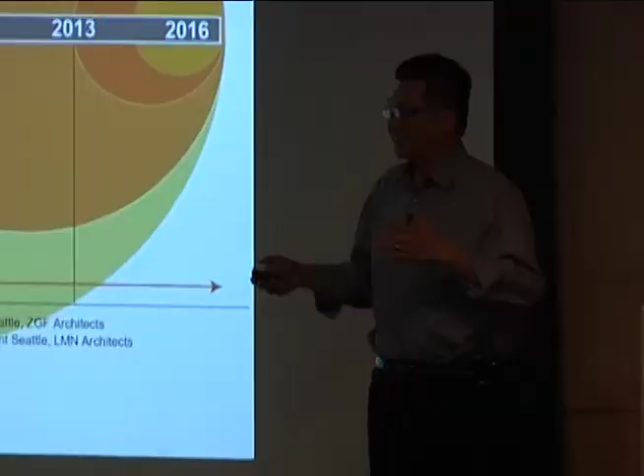Given the fact that I did come from this program years ago, I thought it would be fun if I just mapped out where I have been briefly, so that I remember to share with the school too. So graduated in 98... 89, and it is true that I bounced around quite a bit because I was very interested in just learning different things. I went to New Haven after 2 years at New York, then went to LMN, and then, as Jeff mentioned, I came from Vietnam of Chinese descent, and I really wanted to go back to China, to Asia at least.

So I actually got licensed in 95 and then told LMN that I would go to Hong Kong. I got a round trip ticket and $200 and I just went. The economy was great back then, so I ended up staying there for 5 years, then came back to LMN with no intention of ever leaving them, but things happened, so I did go to ZGF for 7 years, and then now I got home to LMN again.

Over the years, again, it's very fortunate the project types that I get to do, and one thing I will love to do that I never have a chance to work on is a fire station, so I still want a fire station. But this is pretty much some of the work that I have done over the years, which I think has been a lot of fun, and I certainly have been very fortunate, I would say.

Seattle, Washington, that's where we're located. We're about 160 people with 9 partners, and because we are one office environment, we tend to collaborate a lot. It's in our blood. When we work outside of the state, we collaborate with people, and that becomes something that we really embrace. It's not only internally, but externally, that's what we do.

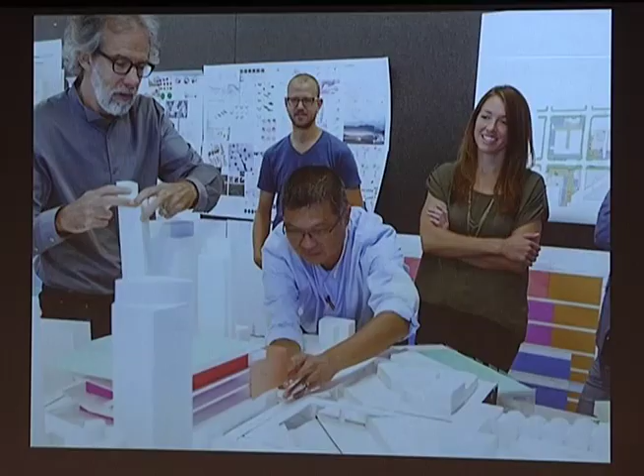And then we do a lot of design reviews within the office for projects, especially the bigger projects, and the intention is twofold. One is obviously to solicit ideas across the office to better the design, but more importantly, it allows the younger staff on the project to learn how to present better over time.

And then, of course, we make more models. With that, I want to show a brief video that I think would give you a good sense of who we are.

Okay, so I missed one slide, sorry. With all of that, we formulated back in 2009 this design and research group that we call the Tech Studio. Basically, we do simulation, fabrication, and obviously visualization and parametric modeling. Here we go.

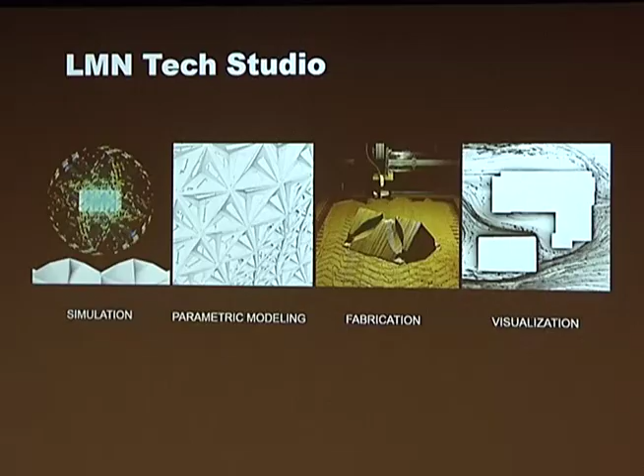The firm is very interested in how we can play a part in the evolution of cities in the 21st century. As cities get increasingly dense, the public realm becomes very important. Those issues are not simple. They involve broad thinking with a number of different perspectives. A city at any moment in its life is not an aggregation of objects so much as a set of systems, complex cultural, economic, and social systems.

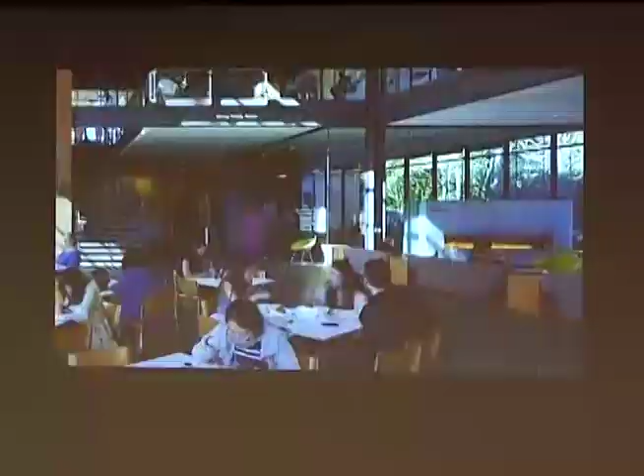LMN embraces that longer view and larger responsibility. Some of our most interesting work has been where we've engaged non-traditional collaborators like environmental psychologists or marine biologists. You can see it in the way that building operates. There's kind of a real blurring of the lines between the building, the park, and public interaction. Some of the most important buildings have been designed by LMN.

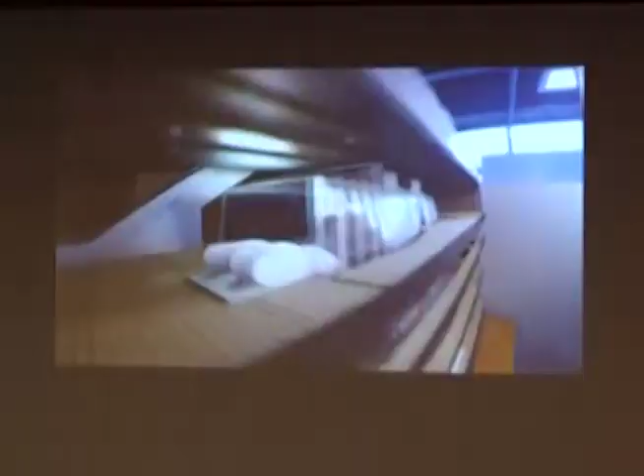These are places that we go that contribute so much to just the heart of our city. Not only are they creative, pushing the client forward and thinking about what might work, but they really work very well with so many divergent voices, and helped us all understand how we could actually achieve this incredibly complex puzzle.

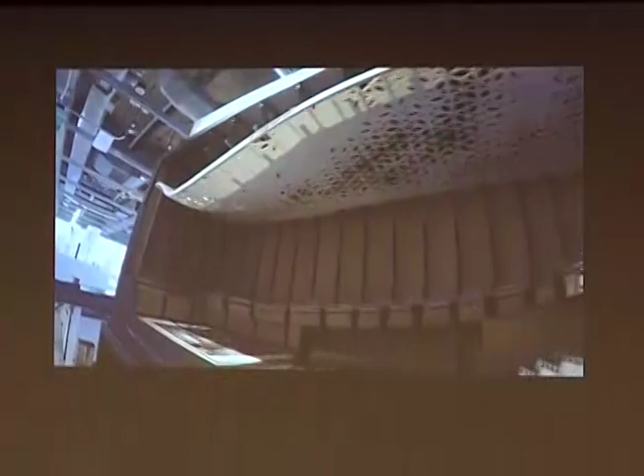One of the things that's really interesting about this practice is the use of digital strategies to re-establish a relationship between thinking and making, and how architects deliver value in that intersection is the big question of the 21st century.

The way we're trying to set the shop up is basically that it's a garage. People can come down and try to manifest what they see on their screen right now in real time in a physical world. There's just such a huge variety happening in the office at any one time that you walk around and it gets you excited.

And clients love it when they come in here and see the wide range of discovery we are making. When I arrived here, there was a really great culture of self-expression - I'm sitting next to a partner, and I'm an intern, there's no barriers between anybody. I just see our project as a little city.

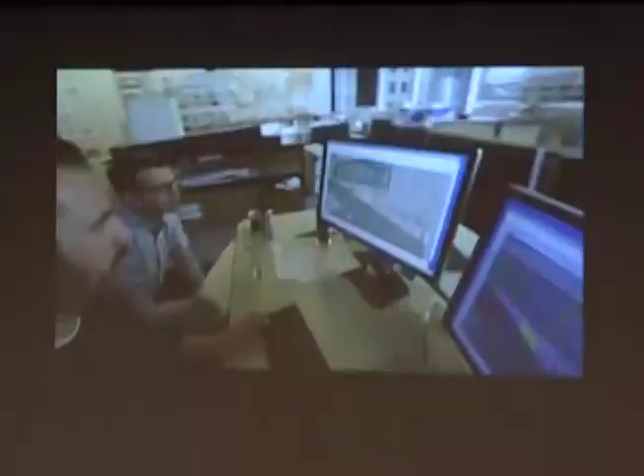I think it's beer every Thursday for me. That's awesome, and all the free food. And the great thing about the profession is we're always learning and we're never done.

Yes, we do own a couple of drones.

Obviously, one of the first projects that people were aware of us for is the Vancouver Convention Center West. This is, again, with collaborators beyond just the architects - landscape architects, structural engineers - but a list of some 30-something international consultants that we actually have to collaborate with, including a marine biologist, and I'll explain a bit more in a bit.

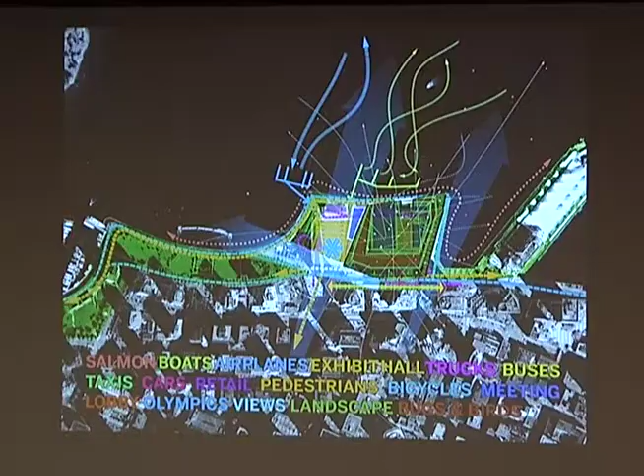This is a pretty interesting, complex program, not only just the convention center, but the siting of it and trying to stitch together the missing piece that the city left there. It has a lot more to do with beyond the functional program of a convention center, but how to engage the urban side of the city and also the natural surroundings, with all the green spaces we provided, stitching together pedestrian and bicycle linkages and the views. And last but not least, for all the bugs that showed up on the roof there.

The interior space is very nice, but what intrigued us more about this building was actually all the exterior spaces that we were able to create. Some of these images are actually from the Olympics back in 2010 - the Winter Olympics - and also how the locals used the space in ways we didn't even imagine. But the point is, by creating them, it will happen.

This was set up for a banquet for the convention center, but on one hand there's the juxtaposition with the urban context and the tower, and then you turn around and your view is literally stunning. That was a really great site we were able to work on. The non-convention center aspects, just as important, are lined with retail, and local people get to use and enjoy it every day without even being aware of what's going on in the convention center.

Beside the human habitat, the marine habitat is also intriguing to us. It's built right at the edge of the water, so we did engage a marine biologist - she came out from the UBC program to understand the concrete plank, the precast plank, and how to use various aggregates and things to attract the most marine life. At the end, we nicknamed it the fish condos down there.

On the roof is the largest living roof that was ever made at the time outside of the Ford assembly line, and since then it's part of the water collection and conservation system coming down from the roof, in line with all the building systems and sustainability strategy employed. It did end up being the first convention center to achieve LEED Platinum - even though I like to joke that it's the Canadian version, it's still a very good one.

Now it has about 4 colonies of bees, some 250,000 bees that live on the roof.

Again, this image I also very much enjoy seeing. It's like it could be anything. It didn't have to be a convention center. So it's achieved the other purpose: to stitch together what's missing there as part of the urban life.

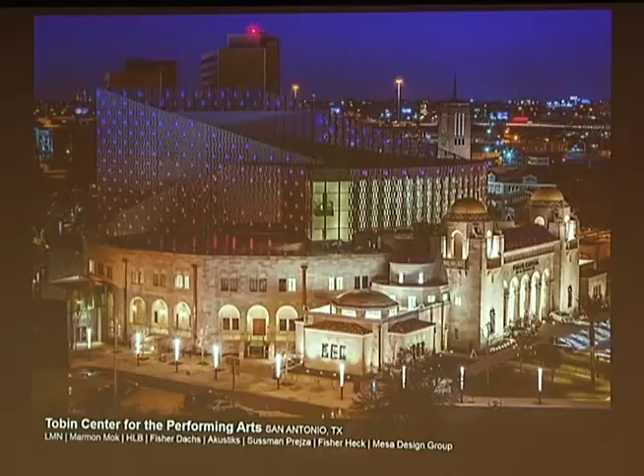This next project is also quite interesting for us to do: the Tobin Center down in San Antonio. It's an existing historical municipal auditorium, and we were awarded to do the project where we gutted out the inside, renovated the lobby, and then instead of inserting one hall there by tilting it, we were able to find space for a smaller hall that inserts in there.

And in addition, similar to Vancouver, we were trying to find the opportunity to create additional outdoor spaces. In this case, it's the Riverwalk event plaza that leads down to the Riverwalk there.

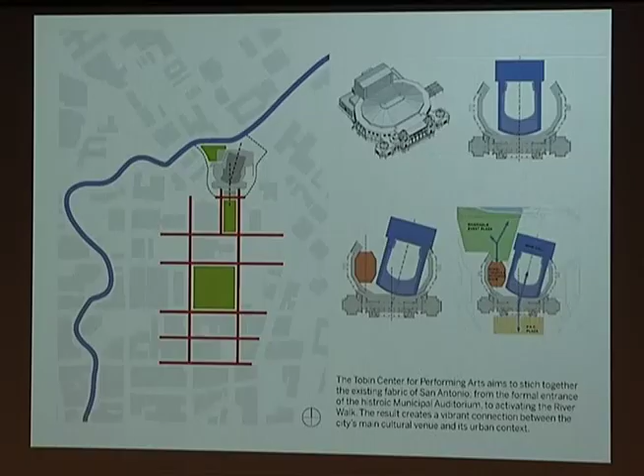San Antonio is called the city of festivals. They have a lot of really beautiful color and textures and such that we drew our inspiration from, and from that created some of this pattern that actually happened on the building design itself. Wrapping the hall is this painted aluminum panel, some of them perforated and backlit with LED.

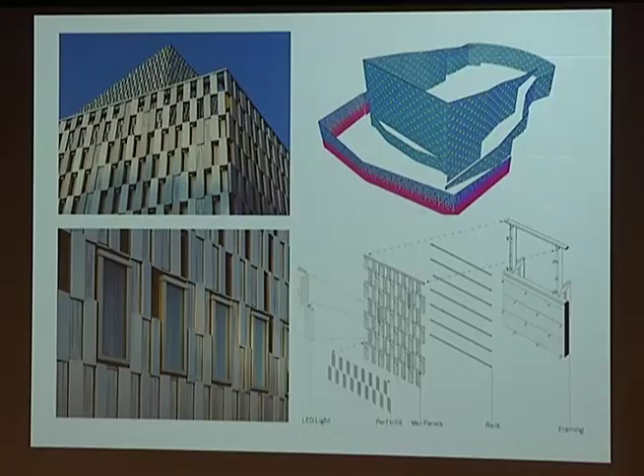And this is what it looked like. It was opened about 2 years ago, and people find many different ways to use the exterior spaces. I really like the yoga on the plaza one.

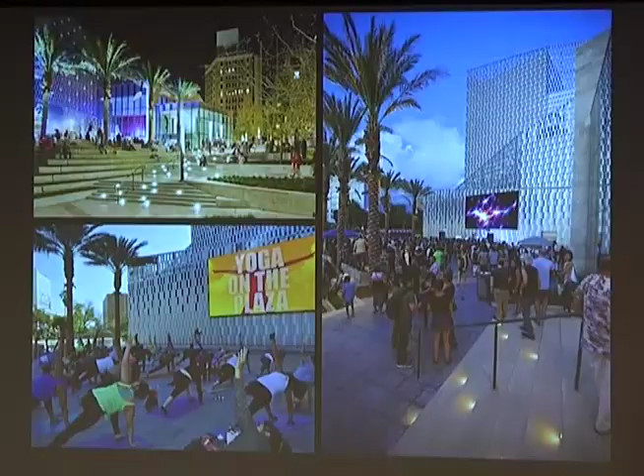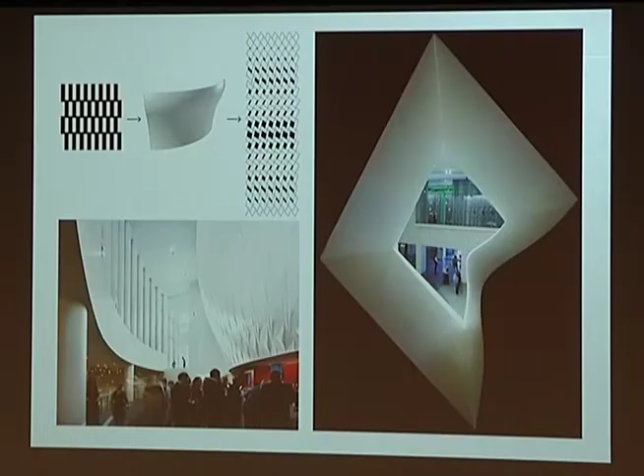It's also the first hall in the US that has a flexible floor, the gala system, that would allow them to convert it from anything from a cabaret to symphony to a rock concert and even banquet.

Back to closer to home now, this is University of Washington Business School. We were fortunate to be able to land this commission.

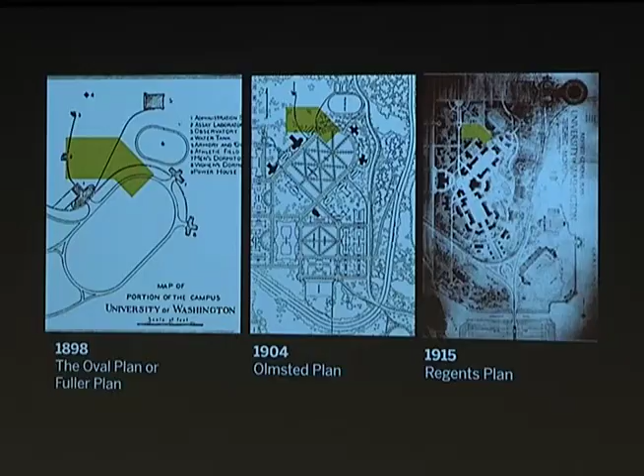It is at the edge of the Olmsted Plan, or actually Denny Yard, and it evolved a bit, but it's one of the bigger green spaces on campus. And this building is literally at the edge of it.

Zooming in, we were also intrigued by the fact that there's a circulation pattern, not vehicular but pedestrian, that cuts through the site, and we always imagined that as something to respect and use beyond the normal spaces and program requirements inside.

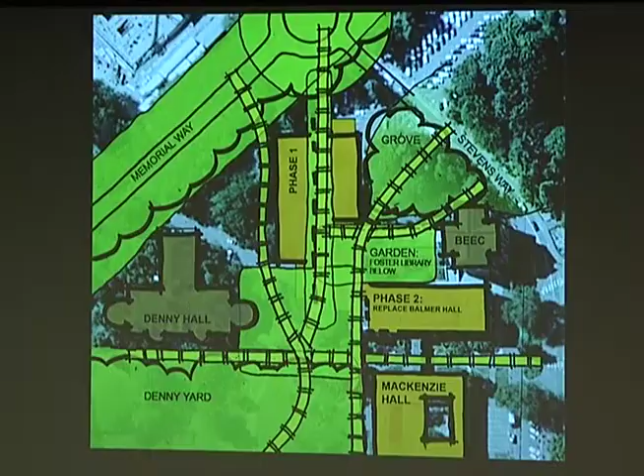Since then, we finished phase 1, called PACCAR Hall, and phase 2, Dempsey Hall, have been completed. Currently we're working on phase 3, Mackenzie Hall. Once that's finished, we'll be able to complete this corner of Denny Yard.

Programmatically, business school has a lot of classrooms, various styles of teaching. This one is about 80% horseshoe-style interactive classroom. You obviously have bigger audience tier classrooms and flexible event space also set up for gathering.

But what intrigued us most again is the in-between spaces - the space connecting all the classrooms and the circulation pattern, and can we make something more out of it? This is one of the main corridors with eddies set so often to allow for informal interaction and chance meeting.

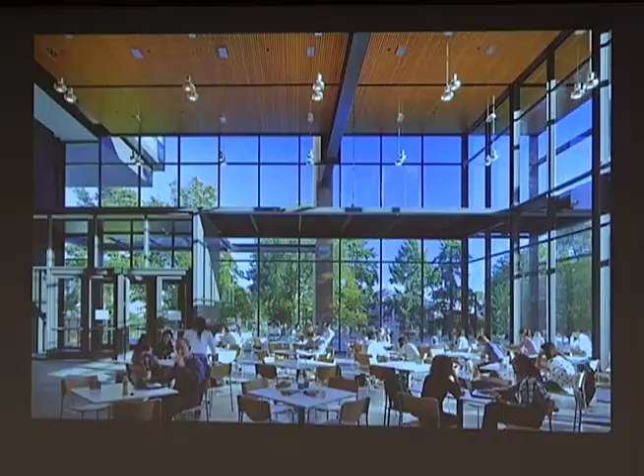One of the bigger lounges, and in this case it's the cafeteria actually, with a lot of daylight, and then the view out to Denny Yard that we're trying to capture.

Since then, this was great because it allowed us for the first time to go back to the building twice to actually survey the students and understand how they have used the space.

Peer-to-peer and non-peer interactions matter, but since this is mostly MBA students, the career bit is key: interaction with non-academia, with potential employers that come to the space, has become extremely important. The notion of bonding within one group versus bridging from one group to another, and creating spaces that allow for all of that to happen, is quite important.

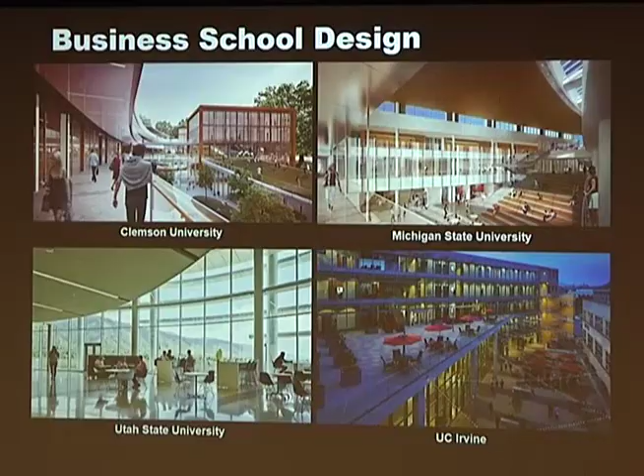Since then, we have used the knowledge we gained and designed and completed the business school at UC Irvine and Utah State University's Jon M. Huntsman School, and currently we're working on two business schools, one in Clemson and the other in Michigan State.

As part of our practice in recent years, transportation has become extremely important. The traffic in Seattle is a little bit worse than here. About 10, 12 years ago, the light rail system started in Seattle.

Not only what it looked like and whether you can find it, but its relationship to crossing the busy street with bike lane and pedestrian way back to the Rainier Vista, the green area that overlooks Mount Rainier. It's right next to the UW Husky Stadium, which I'm not going to go there about Pac-12 football tonight.

Again, not unlike Vancouver, a lot of different systems come together, and how to capitalize and solve that has always been interesting to us.

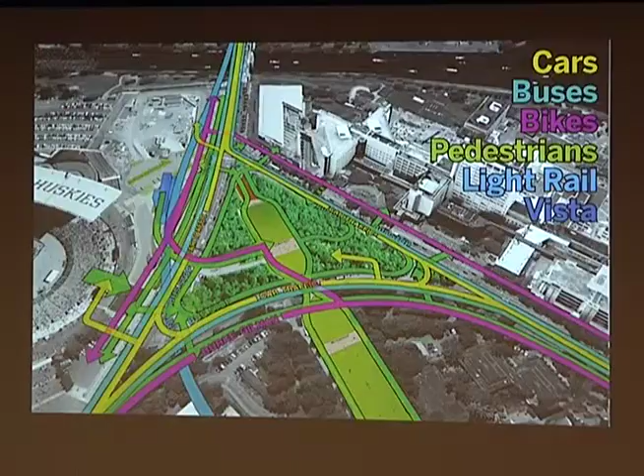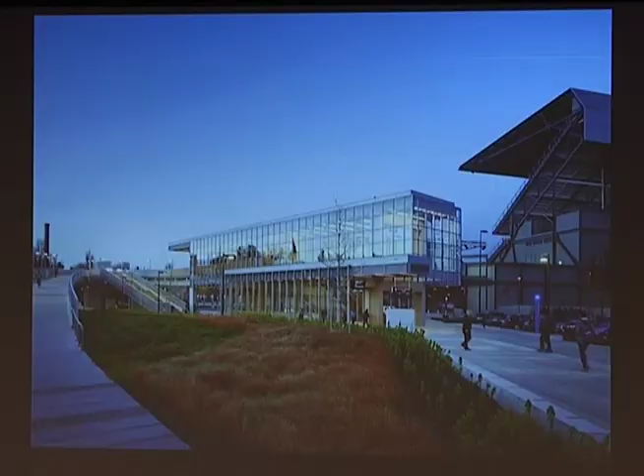And obviously, when you get close to the exterior, the daylight is the thing that draws you out. So again, this was a really fun project for us.

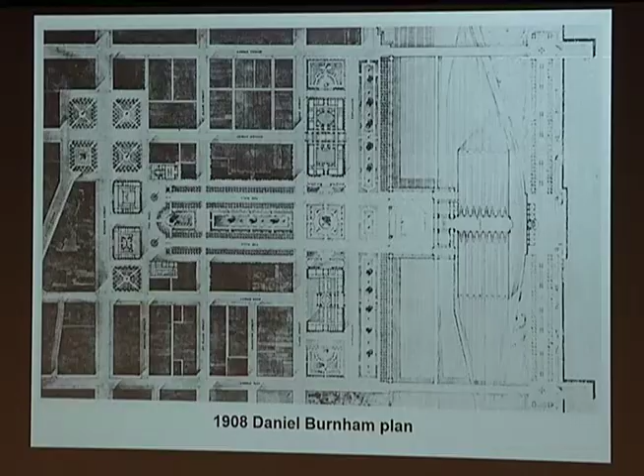This one is the Cleveland Convention Center. Somewhat different than Vancouver, but again quite fascinating. It comes from a 1908 plan that created a central green space for the city, and we're trying to respect that. Programmatically, it's an exhibit space with ballroom space.

We're trying to put them underground, finding a way to insert something and lift up certain aspects of it. This program actually comes with an office building to the side also. Sectionally, similar to some things we learned from Vancouver, we lifted up the park to form an entrance to the exhibition space below.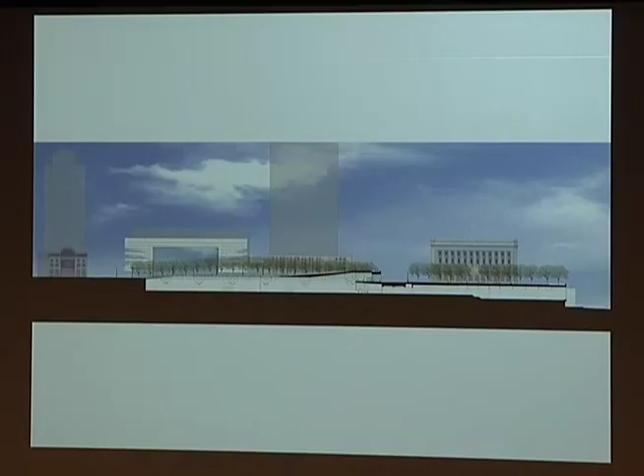It was a bit controversial for some folks because they were wondering if we were blocking views from inland. So we went through a lot of study and showed various things, including the existing view corridors, where it's true the view is wider, farther out, but it's truncated at the park because of the original planned buildings, if they were to build it.

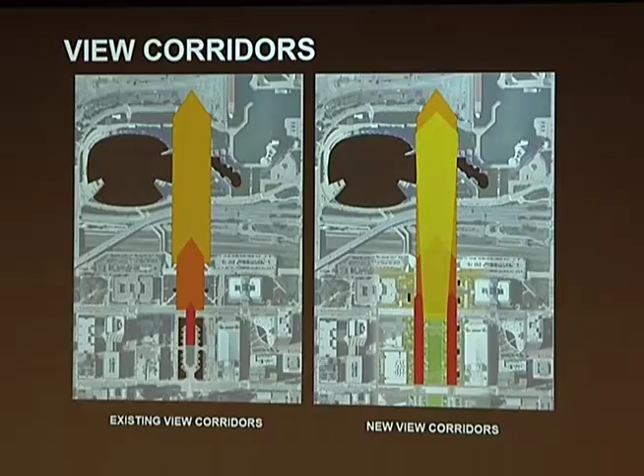With the great thing we were doing in Vancouver, what we did not achieve there was that the exhibit space was actually underground. So this is the first time we were able to lift this and bring in daylight into the exhibit space. This also helps when clients begin to realize that's something people want, because for the longest time, exhibit spaces tend to be just black boxes where people like to control the lighting environment.

As part of that, like I mentioned earlier, is the office building. Originally it was conceived as a very normal, simple office building with a big atrium, but it would have been just simple precast with ribbon windows on it. Halfway through the project, the client thought we needed to make it more dynamic to relate to the surrounding.

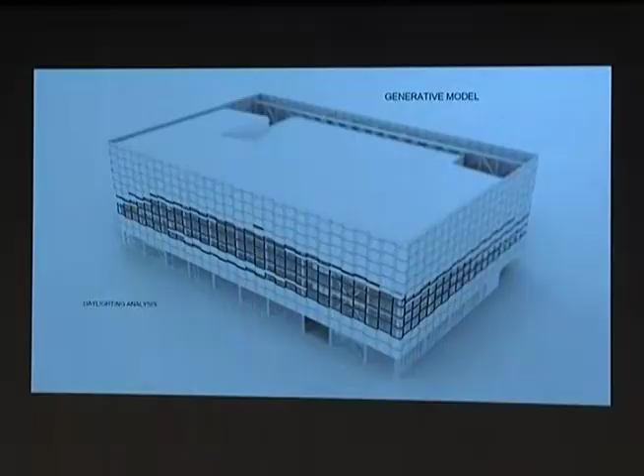So we ran through a lot of daylighting analysis and tried to create patterns and also create something interesting on the facade.

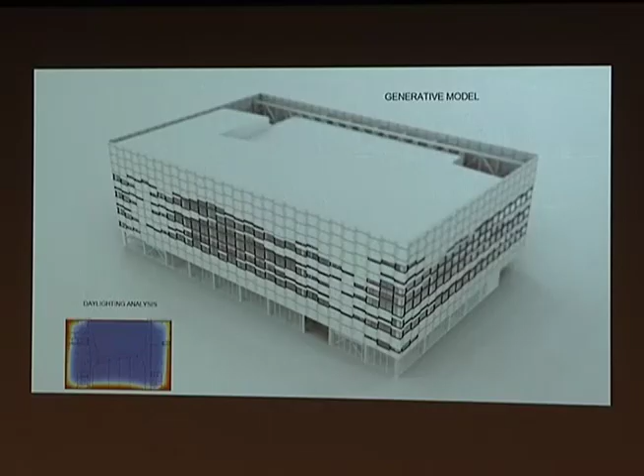This was back in the late 2000s, so Revit was not as advanced as now. So we used Grasshopper to create it, and then we had to write our own plugin to translate that into the Revit model. With that, it would allow us constant, instant updates. If we change something, the contractor can get that information right away.

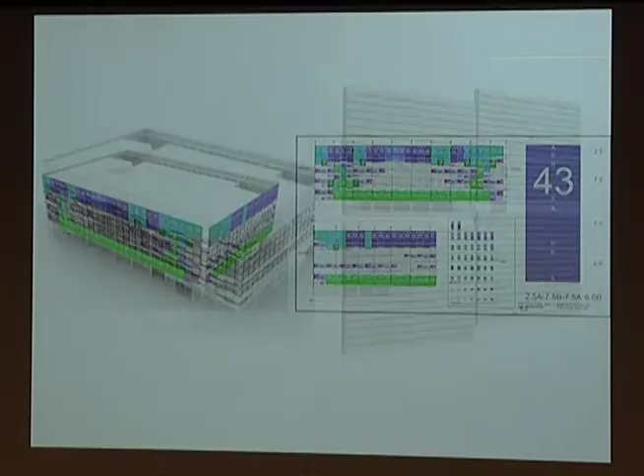With that, we thought, okay, let's go and play with the precast panel and see what we can do. A lot of historical buildings there have really fine horizontal rustication on them, so we were trying to see if we can do that, testing different looks of it.

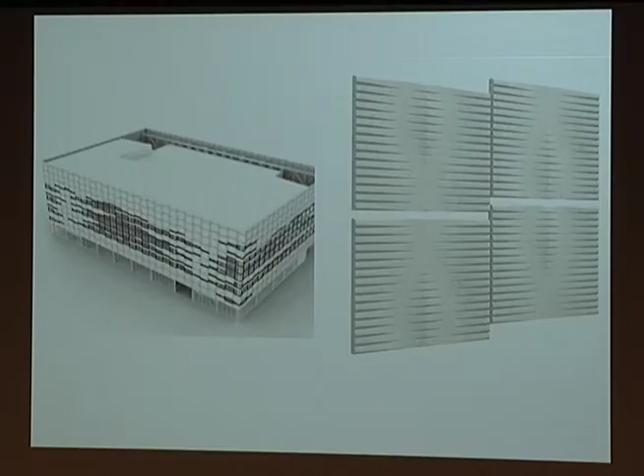And this was the one that we thought had a lot of potential, so we tried to make it. This is a half-inch scale model that we created, and through trial and error, what we were trying to determine is how thick, or what depth and dimension, we needed to create the light and shadow that we desired.

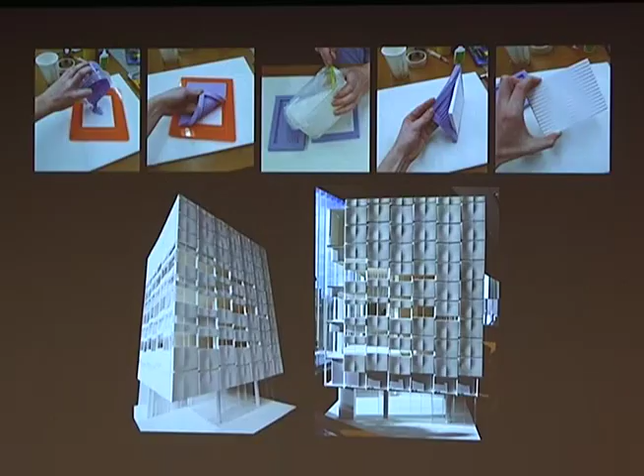It turns out 1.5 inches is plenty, more than enough. We did look at 3 inches, but it got a little too much, and obviously cost is always a factor. So with that, we translated that and gave it to the precaster, and they used it to build.

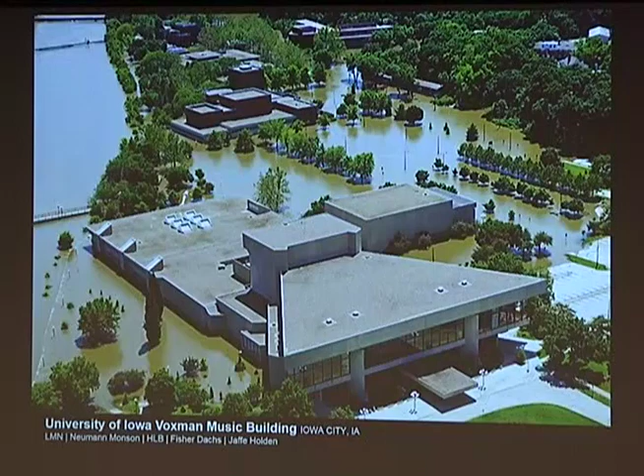And then again, this is one of the wonderful projects that shows up once in a while. University of Iowa, this is back in 2008 when the existing school was flooded out. With the FEMA money, we were fortunate to be selected, and the site was moved into downtown instead of at the edge of the river.

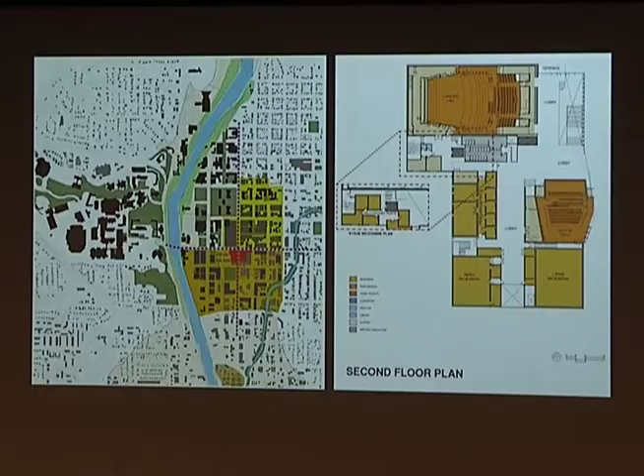Again, this is a great program, always fun to do this sort of work. But what we were looking for was also the in-between spaces and the client's desire to bring daylight into every hall, the big recital hall, and all the practice and rehearsal spaces.

From that, we were using daylight not only for the room, but also as a means of intuitively guiding how one circulates through the space, and informing us how to stack all the programs.

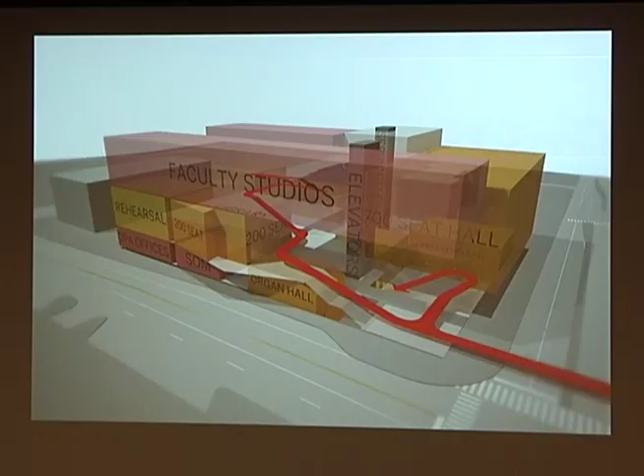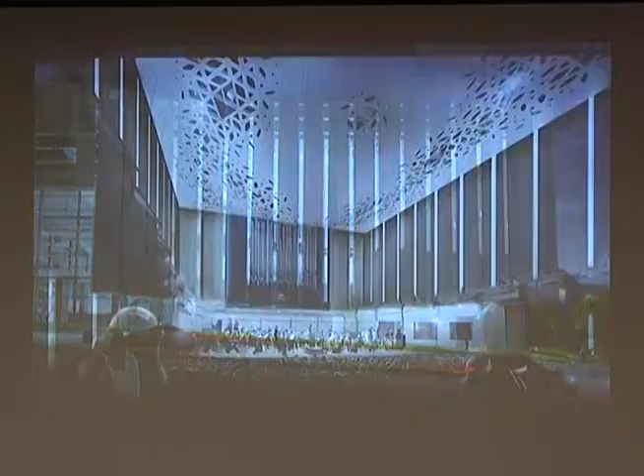And in the interior, that's what we were conceiving. But one of the things that's really intriguing about this hall is the ceiling itself. We know that we need to have reflective sails over the stage side, but we also wondered if we could expand this thing and create a ceiling outlet to make sure it captures the house light, the stage light, sprinkler heads, and all of it.

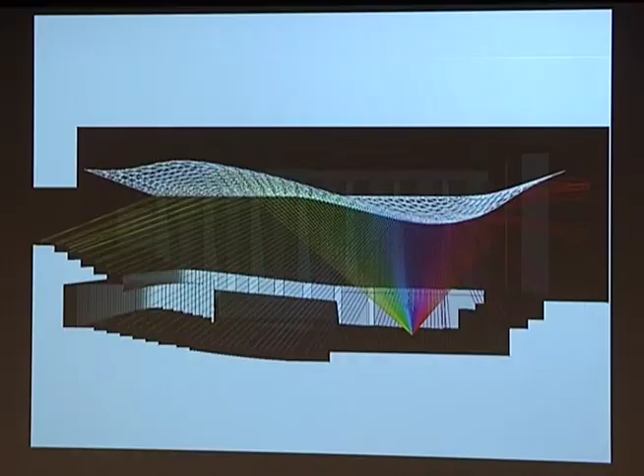So this is the one that we actually worked through with the acoustician. Sound is a wave, so we can approximate it by ray tracing. A very smart person, not me, wrote the script, and then we figured out how to manipulate this, and it could be done live with the acoustician in terms of how he or she wants to shape that.

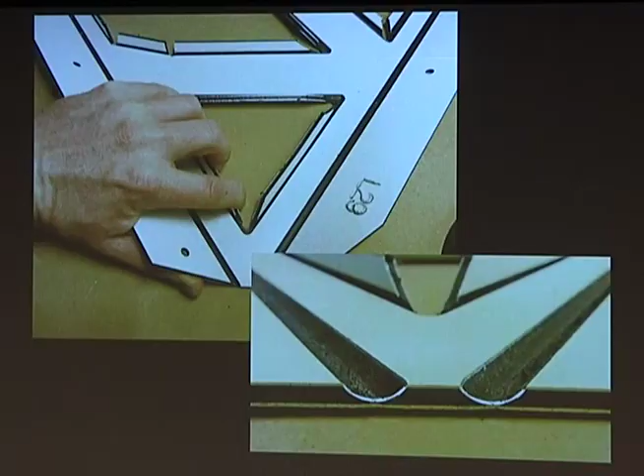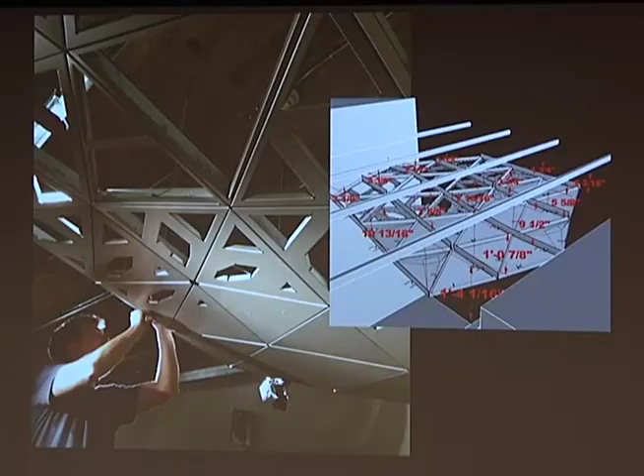So with that, we thought we should build it. One of the materials that's quite commonly used out there is aluminum composite panel, literally used for gas stations. So we bought a lot of that and made it ourselves, just to prove that we can do it. We built it at third scale and actually hung it up in our office, testing out all the kinks. From that, we mapped it, and it became our documentation to go out as a low bid job. And this is what it looked like a few months ago.

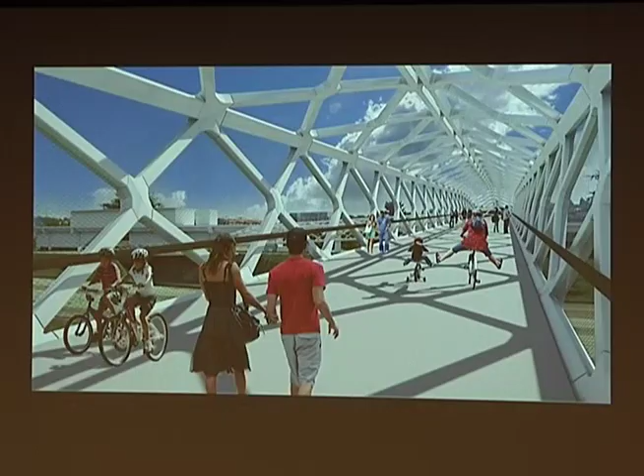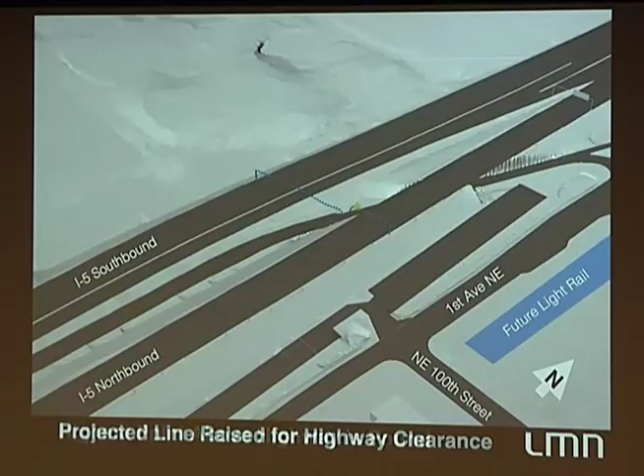So this is one of the things that we actually brought to the meeting to work through with the city, WSDOT, and the neighborhood group — how to figure out the alignment and where it should be. That all needed to satisfy the ADA slope requirement, and also the bike lane curve radius that came into play. This was a very helpful tool for us, and eventually this is where we landed in terms of the route.

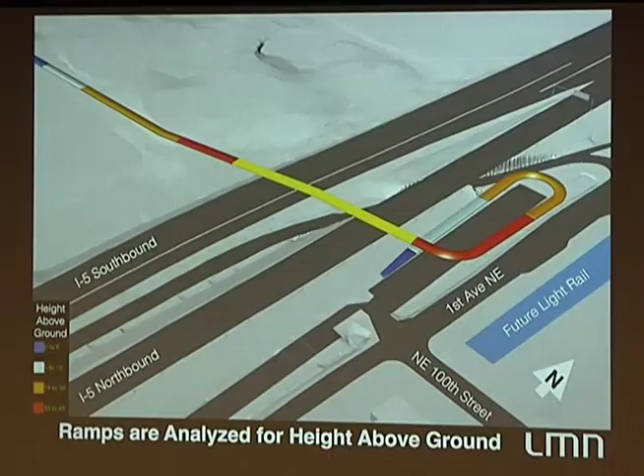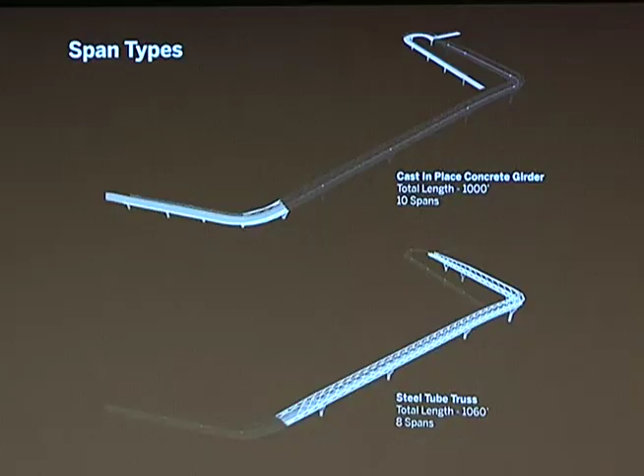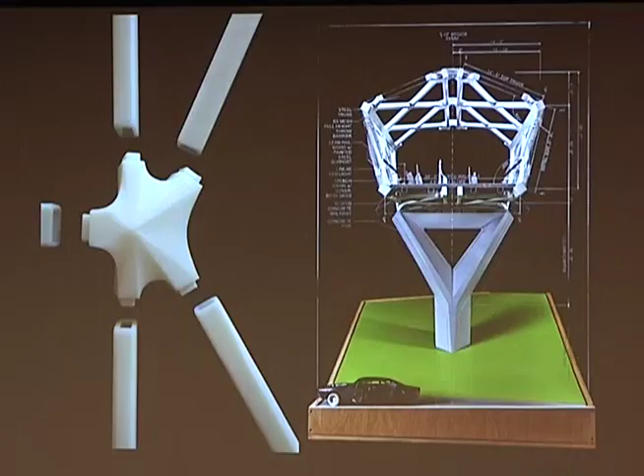From that, we also figured out that the middle span could be done with steel tube trusses. So we simulated it, and figured out that there are probably six different types of cast nodes that we need, because that's where the money becomes expensive — when you have to make the molds for them. From that, we not only virtualized it, we actually built a mock-up, in this case just with in-house 3D printing. We then constructed this sectional model, which became an extremely useful tool for the office, for public outreach and meetings with the various agencies.

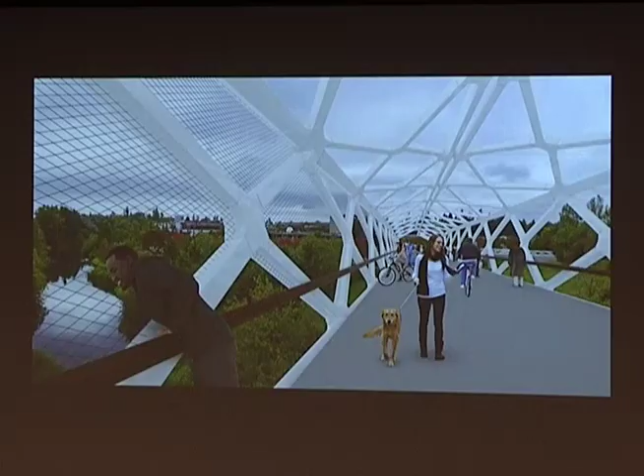Again, with this open sort of bridge, we hope that it would allow people to be more engaged with the environment on the exterior.

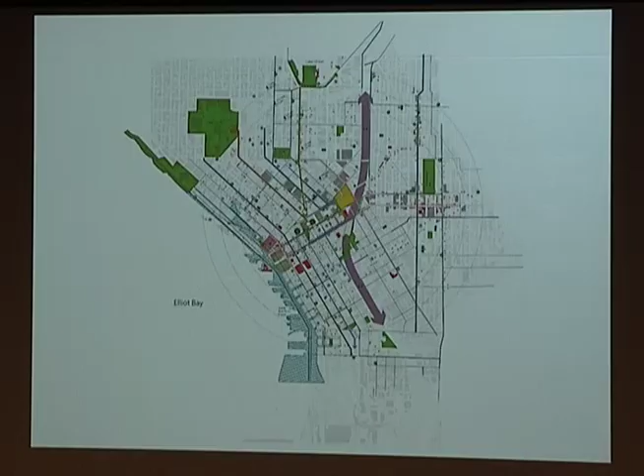The city of Seattle has grown a lot, and we're part of it. It's great that we've had the fortune of working on many projects since then, and this one is the most recent convention center we're working on. The yellow box is the new site for the expansion project, with the convention center and co-development site. Over time we've had the fortune of working on all these little boxes shown here—some under construction, some completed, some still in design. It's always great to be able to influence quite an area of a city.

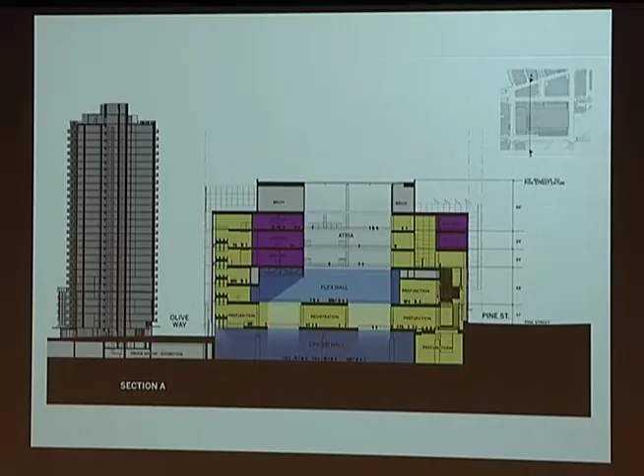This is a stacking diagram of the current convention center. It would be the tallest in terms of number of stories—11 stories. Sectionally, at the bottom you have the exhibit hall, and because the street varies in height, we're able to bring daylight into it, not unlike Cleveland, while also testing the notion of cutting holes through the building to create atria. On the left, where the truck loading is, we're stitching two towers through where the core should go—a residential tower at 300 feet and an office building at 240 feet. It's a lot of fun, and this is currently in design development.

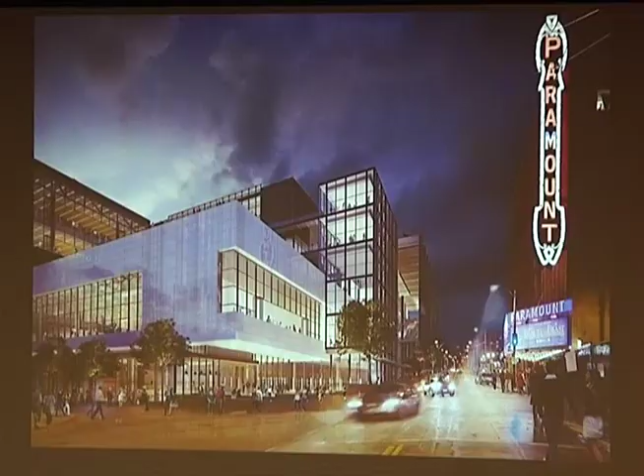Some of the breaking down of scale here relates to older buildings nearby—the beloved Paramount Theater is just across the street. Being in such an urban environment, and applying what we learned from Vancouver, we're trying to create as much retail space as possible at all the edges, except where the convention center entrance is. In some instances, the market becomes a mixing zone between convention center goers and local people. On the other side, sitting on top of the loading area, is the office building and the residential tower.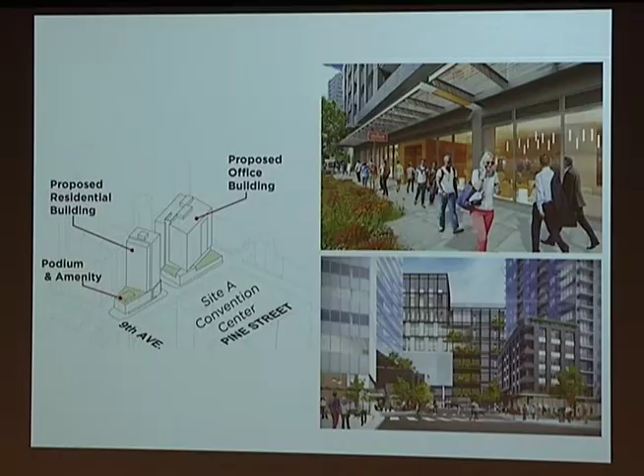Last but not least, as the city grows, land becomes less available, so it makes more sense for someone to build taller. This is for a project in Columbia, in a neighborhood with no residents at all—mostly office spaces. Our client decided it would make sense to put about 1,000 units of residences here, to make it more of a 24/7 neighborhood. As architects, we agree.

One thing we wanted to touch on is: if you go from a horizontal neighborhood with all its amenities, how do you translate and capture that into a vertical environment? Adding to the city, the site, the context, and the influences form part of what we think is necessary to consider in the design of this tower.

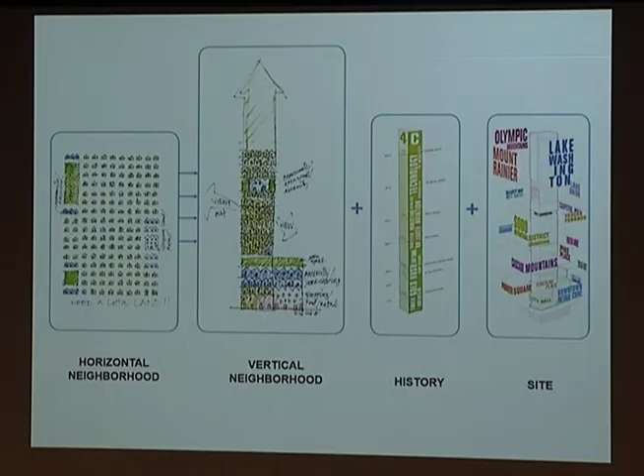On the more scientific side, we started by understanding where the tower should go. The curved face in the first image is actually the Columbia Center, the black tall building—the tallest building we have right now in Seattle. Whether we like it or not, it's very iconic and part of the city, so we want to respect that. Also, if you don't block their view, chances are they don't block yours either.

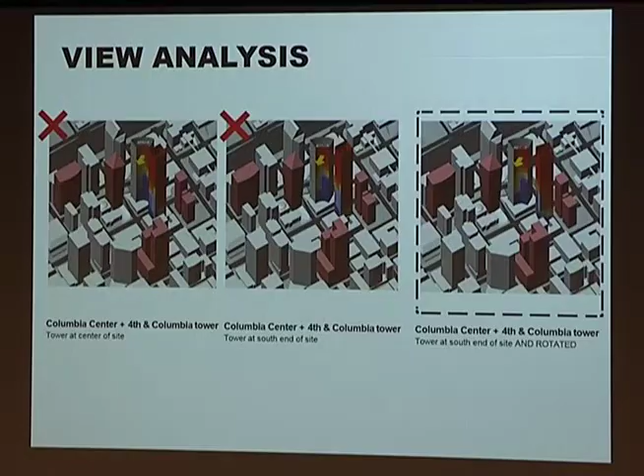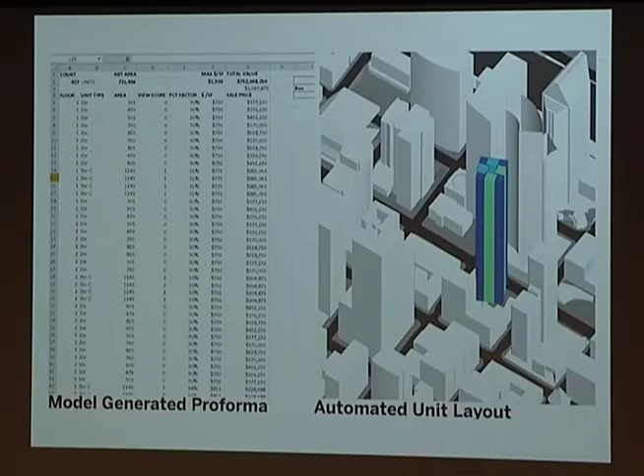More locally, we shape it based on local conditions like various other buildings' heights. At the same time, we can generate a spreadsheet from it—assigning a view score that the developer can use to place value on those things. This can happen very quickly: if we change the unit layout or the stacking, we can put out a spreadsheet showing all of that.

Of course, the fun part of it is also just form making, and we just generate a lot of them.

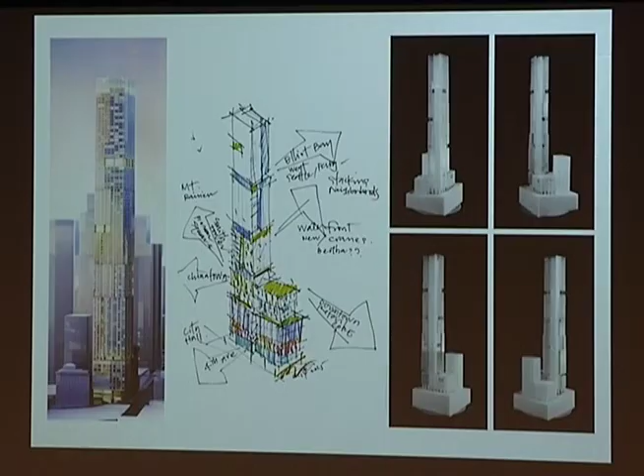This was generated a number of months ago as part of the city design review process that we have to go through.

Here's a good section that shows all the yellow are residences up high, and the blue spaces are the amenity spaces for the different neighborhood groups, which also happen to tie into the structural requirements of outriggers and other things we need to deal with.

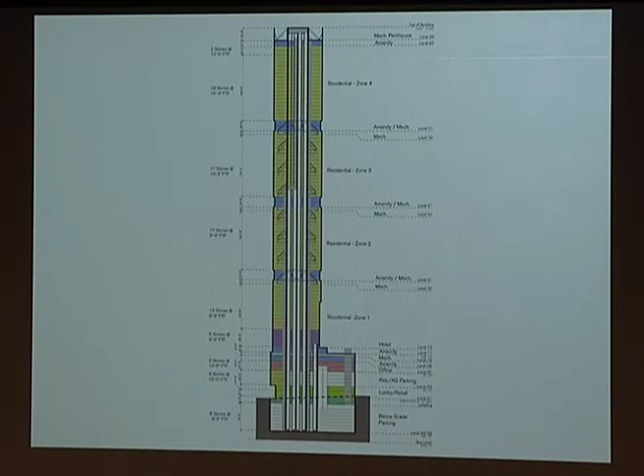Closer to the ground there is a variation of retail, lobby and office, white below-grade parking, and some above-grade parking that I'll talk about in a bit. Dialing that in with the structural requirements is always fun to do.

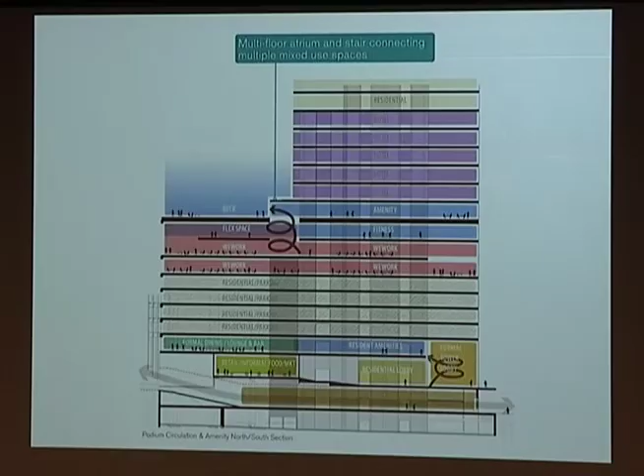Just at the podium, again, locally speaking, we're trying to create two-story volumes and in-between spaces where we can to improve connectivity.

This is a view on Columbia Street. If you know Seattle, it's quite hilly. The avenues run parallel to the water, so they tend to be flat. The streets run perpendicular to the water, so they tend to be quite sloped. Columbia Street is certainly one of them, and this is an attempt to drop the plates of the retail spaces to connect more than just at the corner.

By the time you get down there, it's the garage entrance. I mentioned earlier there was a lot of below-grade parking. Currently, above the two-story retail there is four stories of above-grade parking.

Instead of a normal ramp system, which would eat up a lot of space, we considered that there's a lot of car sharing right now, especially in big cities, along with the thought of automated, non-driver cars. We believe that in the future maybe we don't need as many parking stalls.

So this one is a test, but the client really wanted to do it. Instead of ramp parking, we put a flat plate on the above-grade parking. We're going to install two-car elevators, so it will be valet. The idea is, over time, to future-proof it—if there's not as much need for parking up there, we could convert those floors into more residential units.

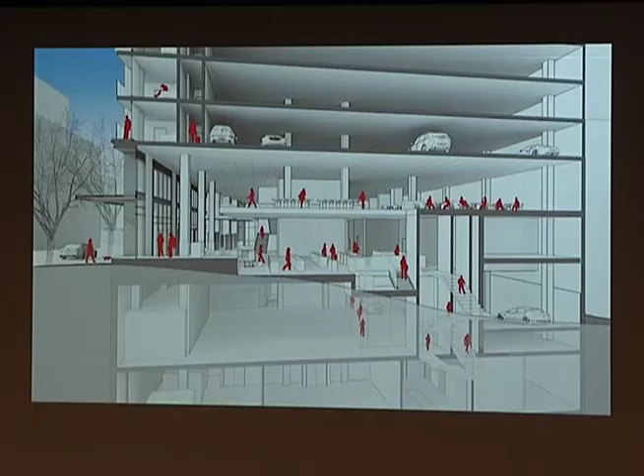This is a bit subtle, but the corner of the tower comes down because of the tip, the rotation we created. What I enjoy most is the image on the left-hand side—the corner of the Arctic Hotel, a really old, great terracotta building that has one bay of terracotta turning the corner. So we shifted our building in at that point to expose that face as part of the experience.

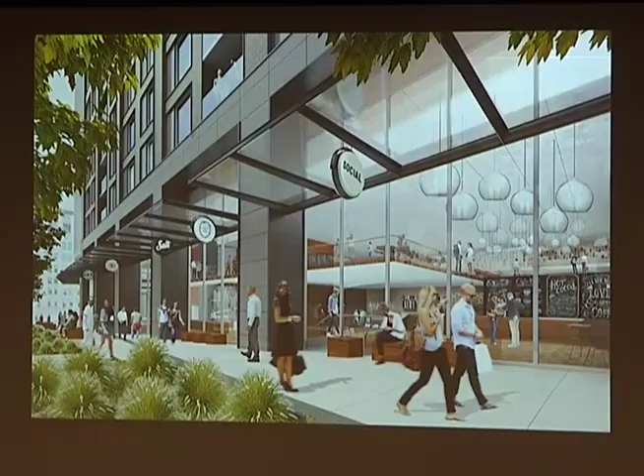Again, this is the retail space along 4th Avenue. The intention is that the retail and the lobby are actually very blurry—there's no demising wall or anything—so it's more about extending the space of the lobby and vice versa.

So, bringing you back to the culture of the office—this is a weekly schedule, and sometimes it changes a lot, but in addition to project work, we have a lot of functions that people go to and learn from.

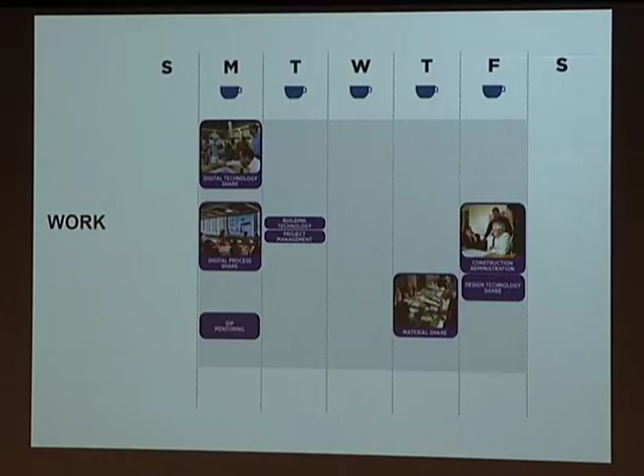And of course, we have Beer Share on Thursday, which is always a big thing for everybody. In addition to that, there's a lot of grassroots outings on weekends and evenings.

So with that, I just want to say it's been very fortunate of me to be able to do all of this and be part of this, but this is where it all started. This is done by non-computer. This is my 5th year project, one of them.

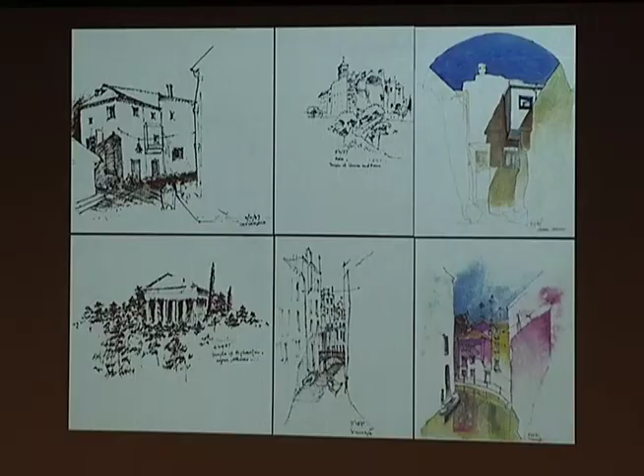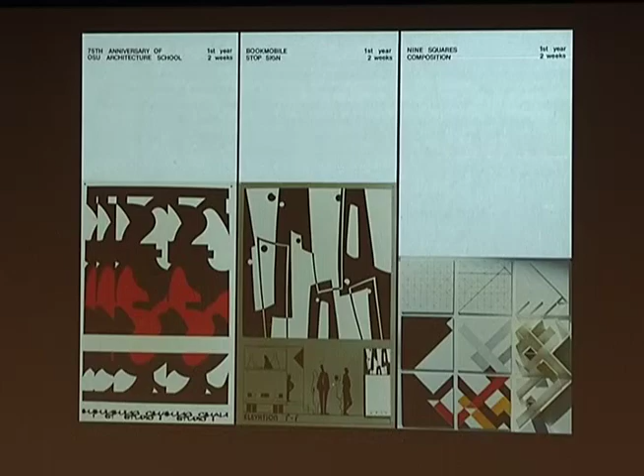And yes, I did go to Europe like most of you did or will in 3rd year. And of course, I always love this, I actually found them the other night. So this is some of my 1st year projects. I don't know if you get to do your 9 square project anymore, but that's always been my favorite. So with that, thank you very much.